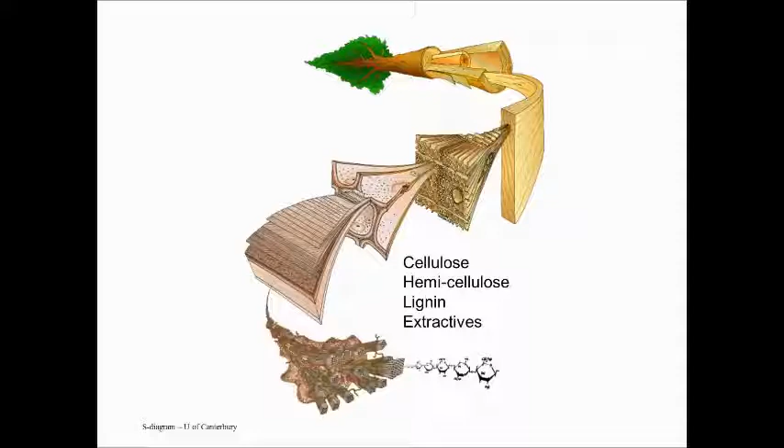Because of the way they're laid down and because of the way wood is, it's very anisotropic, it's very non-homogeneous, and in some cases it's very non-linear in its behavior. And as a consequence of all that, its mechanical property variation is quite high relative to steel and concrete. To give you an idea, coefficient of variation for some of those materials is what, 7–10%. For most wood, we assume that its strength properties' coefficient of variation is somewhere in the neighborhood of 15–20%. And we have to do that because we have to cover the variability of it. That's within one species or one species grouping. If we look at the entire package, we have even a greater variability.

For example, and I'm sure you've all seen this, some of our oaks, wherever you are, oak trees, the wood is very dense, quite durable, and extremely strong. Conversely, if we go out and look at aspen trees, poplar they're commonly called, very low density, not many extractives, so not very durable, and really quite low in strength. And so depending on what kind of species you got and depending on where you're at, you can get quite a bit of variability. And within a structure, especially these older structures, you'll have a lot of people mixing and matching materials, and that can cause some real problems from a property standpoint as well as from a dimensional stability standpoint. So just one of the things we've got to deal with. It's a biological material, and it has relatively high variability.

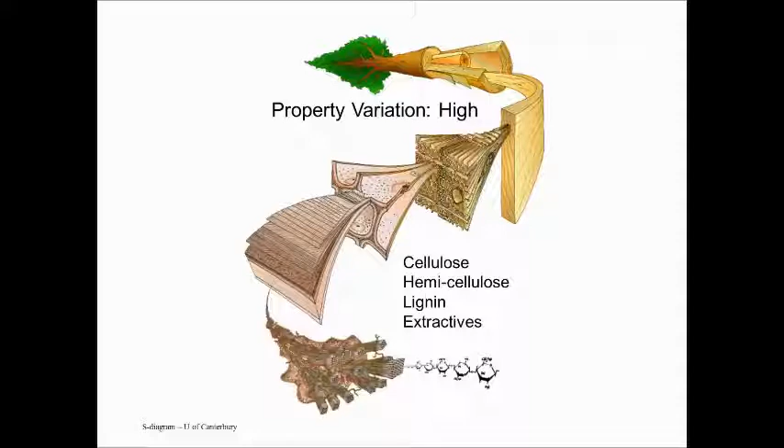Some of the advantages of wood I want to cover. First of all, it has a very high strength to weight ratio, especially parallel to the fiber axis. Wood as it's grown is strongest parallel to the fiber axis. So from a practicing engineer standpoint, it's strongest along the grain or along the 2x4 or along the timber. It's weakest perpendicular to that. Some of the property ratios you'll get is almost a 15 or greater to 1 ratio between parallel to perpendicular properties, so very significant. That's why we have a lot of concern and debate over design of fasteners and how they perform because of that anisotropy of wood. But it is an excellent material from a standpoint parallel to the fibers.

It has a really good record for durability and performance, especially if you look at the photo on the right-hand side. That's a very classic, iconic photo we use. The horizontal member with the nails in it is actually a large timber that survived the fire, and you can see that the steel melted in the fire. Wood does really quite well, especially heavy timber construction in high temperature environments. We get a char layer that forms. The char layer becomes a very good insulator and that insulator protects the inside core of the wood or the timber member that's left from any kind of thermal degradation. So it works really, really well in heavy timber construction and fire. If you want, there is a whole chapter on post-fire assessment in the Wood and Timber Condition Assessment Manual, very well written by one of my colleagues, Robert White. So anyway, it has a very good record for durability and performance.

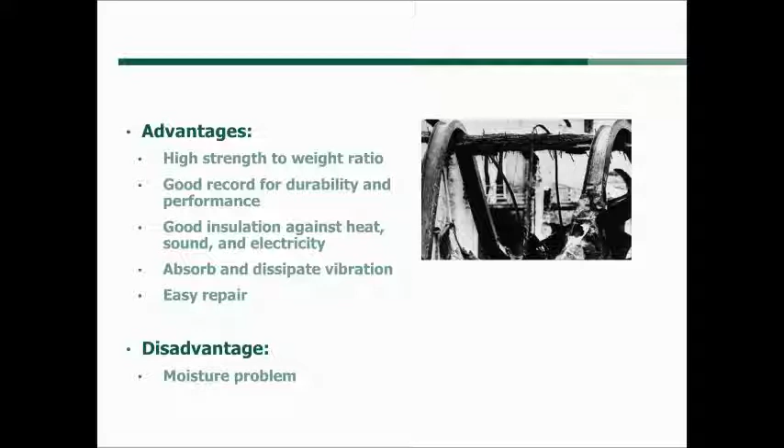If you go to our wood handbook, there's a whole chapter devoted to wood moisture relationships, how it moves, how much it moves for various wood species. The other thing that you have to be concerned about with wood, and I just threw a photo up there, is as beautiful as those fruiting bodies are, they're really cool and nice, and a lot of my artist friends love them. The fact of the matter is, wood is a biological material, and it's a source of energy, and it's a source of food for various bio-organisms.

For example, fungi love to eat the cellulose portion of wood. So when wood gets wet, it provides the necessary moisture in an oxygen-rich environment like we would have above ground. We start to see fungal growth, and I'm sure all you folks have seen that kind of thing. So one of the concerns with wood is its relationship with water. I always say that there's 3 rules with using and designing with wood. Keep it dry, don't let wood near water, and keep water and wood separate. So it's a very important thing.

Now, from an inspection standpoint, and I'll show you some photos of that, the first thing I look for is any place where there's water intrusion or water interactions with wood. For fungi and these biodeterioration agents to work, they need 3 things. They need food and shelter, which is wood. They need oxygen, and they need water. So any place where those 3 things interact, you'll start to see potential for biodeterioration.

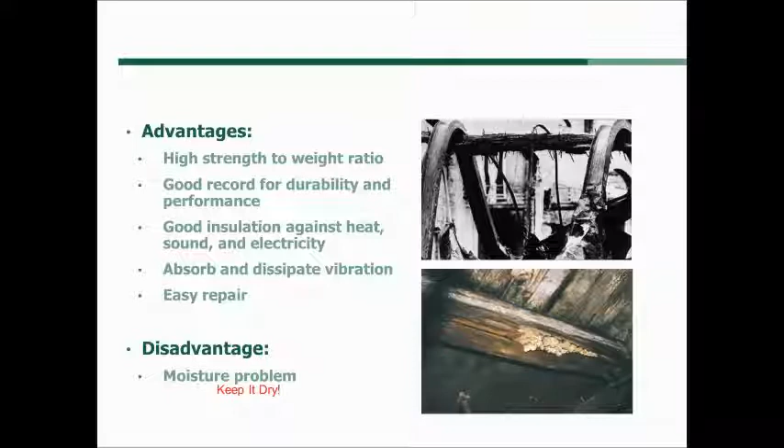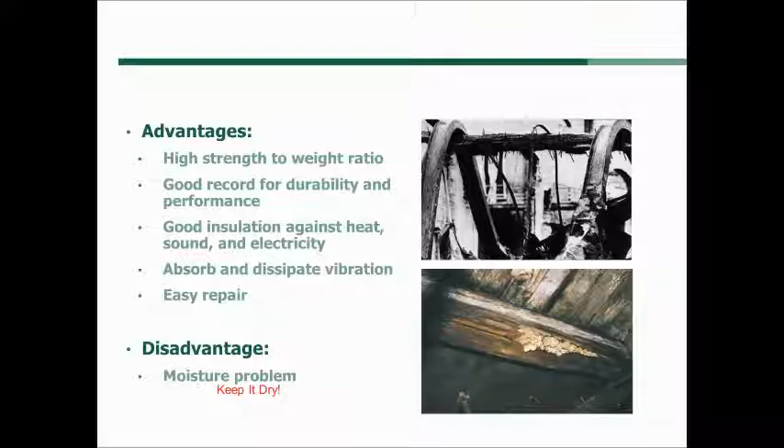And it's a real indication to me, and really drove home to me the importance of wood-water interactions and what can happen if you keep wood dry and manage that, and what can happen if you don't. So anyway, we'll go on to the next one.

Let's start with a little bit of the assessment procedures that we use. When I go into a building or any kind of structure, whether it's a mummy coffin or a historic ship or any kind of building, the first thing I do is an overall assessment, but a couple things we really look for, and if you call in, we need from you. What species is it? I'll go into some of these in a little more detail. That's very important because the design values we use are, to a certain extent, species dependent, but they're definitely species grouping dependent. So that's very important. We need to know that.

We look for things like, what's the quality of the wood? What's the property of the wood? And if you get in there, I'll show you some examples of this. Things we look for are grade stamps, if there's any on there, certain visual characteristics, and from that we can get basic property information for you, or you can derive them yourself from the Wood and Timber Condition Assessment Manual. The other thing we always look for is the condition of it. That's where the condition assessment comes in.

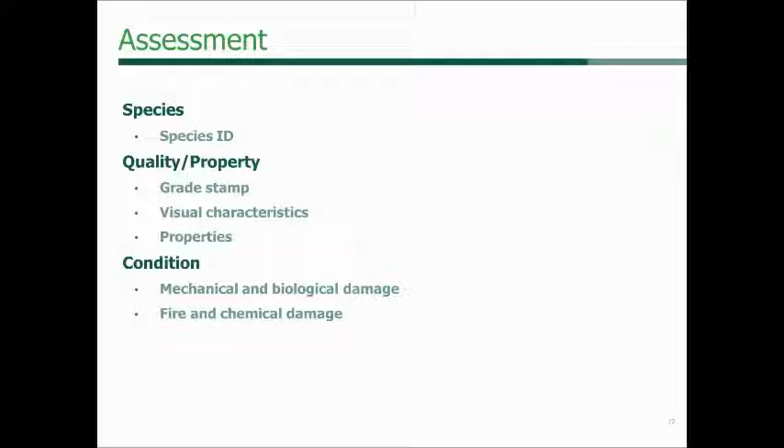Are there any mechanical modifications to the building? I'll show you some examples of that. Any biological damage, any fire damage, any chemical damage? Has it been treated? Is it treated? If so, what's it treated with? Those kinds of things are all important when you want to come up with an overall assessment of a building.

Species identification is usually done with a low magnification visual examination, and there are a variety of consultants. If you get on any of the websites, you can see consultants who do wood identifications. Many universities have wood science programs either in their forestry schools or their material science departments, and they'll do wood identifications for you. We can do a certain amount of those here at the laboratory. We have the largest wood collection at the laboratory, but I always recommend that if you can, get the business out to the consultants and university folks. If you need help getting information on those, give me a call. I'll be happy to give you information on them.

Usually it requires just a very small sample from one of the members, not very big. No more than an inch square. Some of them will even do it if you just send them a sliver. Most of it's done with a small hand lens at low level magnification. And I would guess most of the wood you're going to see in the United States is native to the U.S. And most of the work we do, there's a group of woods that have been used for structural applications for many years, and so it's a pretty narrow band.

But they will provide you with documentation that says, I've inspected this piece of wood and it is such and such a species. Where that's very important, and I get a lot of calls on this, is if there's any loss of life or any loss of limb in any of these inspections, because that will have to be used in a court of law as evidence. So what I recommend in those cases is people get a second wood identification, just like you would get a second opinion in any kind of medical procedure. I recommend getting at least 2 or 3 of those. They should come back with the same species and then go from there. There's a few around, but if you need help, give me a ring.

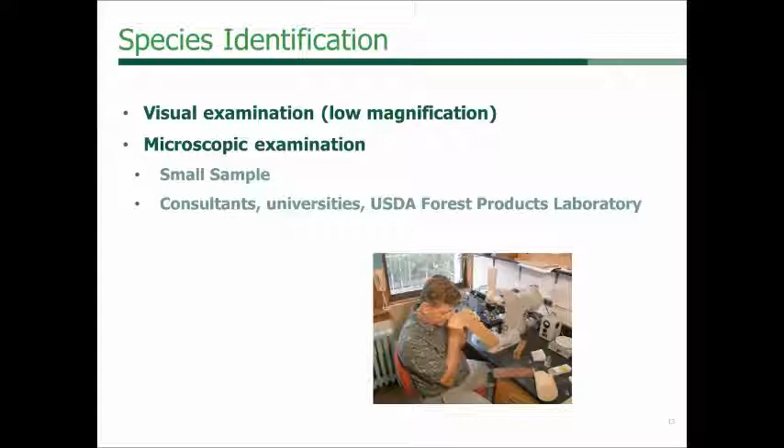You don't have to take out the whole piece. You do not have to tear out the whole piece. You don't have to take a skill saw and go wild tearing things out. Just a small piece of wood, and they'll give you a really good indication of what the species is.

Quality property assessment. And again, I'm not going to go into the details on this, but basically we'll use visual grading rules to come up with the allowable design values. And what they want to look for specifically, on your picture there, you'll see just kind of a generic grade stamp. If you see something like that in one of those buildings and you see it on a 2x4 or 2x12, I always recommend take a photograph of it, get it back to us, because then at least we kind of know what we're dealing with. It gives us a good starting point.

We work very closely with the folks at the American Wood Council and other folks, and once we get that kind of information, we can help you out really quite well. So if you see those, the things that go into one of those grade stamps that we're going to look at, this particular one, it says number 1 and better, that's the grade. That S-GRN, that means it was surfaced in a green condition. That tells us something about the wood.

The very right-hand lower corner of that grade stamp gives us a species grouping, so that kind of gives us an indication of where we're at as far as the species goes. The 12 up on the top there probably is the mill number, so we could trace it back. In some, that refers to the moisture content of the wood when it was constructed. And that little logo on the bottom, that's the indicator of the grading association, in this particular case, Western Wood Products Association.

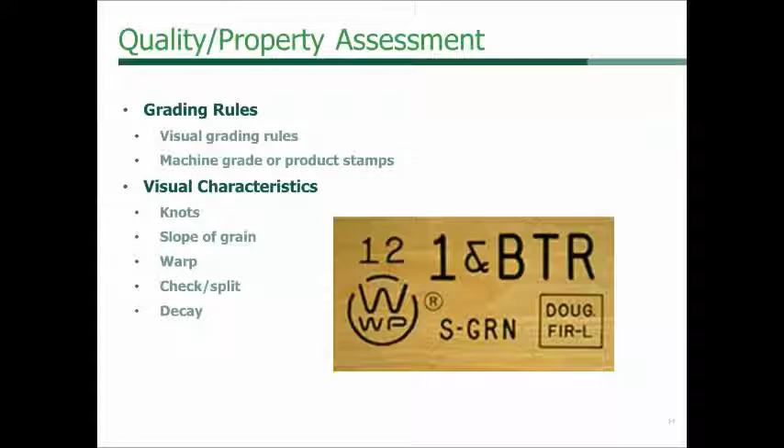That's an indication of very severe deterioration and major reduction in load carrying capacity. So those things are major things you should look for in your visual assessment. Any kind of external deterioration. Now, these are some of the technologies we use, and I'll go through some of these. We look for external deterioration, visual characteristics. We look at probing techniques. I'll show you some of those.

As well as we then will go through and look at internal technologies for detecting deterioration. Simple sounding techniques, drilling and coring techniques, ultrasound or stress wave type technologies, and simple moisture meters. Those are all very good tools that you can use to get an idea of what's going on inside a wood member.

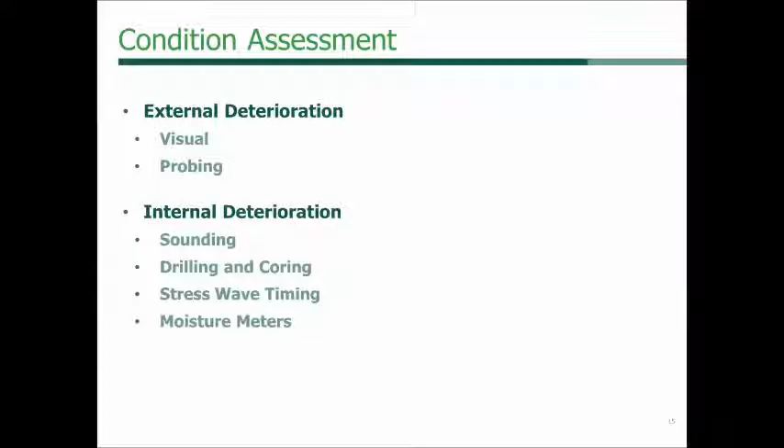Let's start off with the visual inspection. For you folks that haven't done wood inspections, I don't know what you see, but I've got to tell people: always look for the obvious. And I'm going to show you some photos in just a second here that show you some obvious things that you would never think would happen in the field, but they do.

Things I look for: foundation failures. Is the floor level? Are there cracks in the wall? Is there settlement? One of the major things I've seen is the sleeper members that they put on concrete foundations that are wood. If they don't use treated wood material or a highly durable species in that, those will fail, and as a consequence they will deteriorate, and you'll get sloping of the building because of their failure in compression. Those are really good indicators of what's going on.

Signs of distress. I'll show you some photographs of this. Any collapsed, failed members, any excessive deflection, make note of those, then follow up to see what's going on. Any missing members. Now, you may be chuckling, but I'll show you a photo of that in a second. Fruiting bodies, as I said, any kind of biological deterioration that you see, please note it and be extremely leery of any kind of... those probably are significantly deteriorated. Once you start seeing fruiting bodies on it, you've got a major loss in capacity.

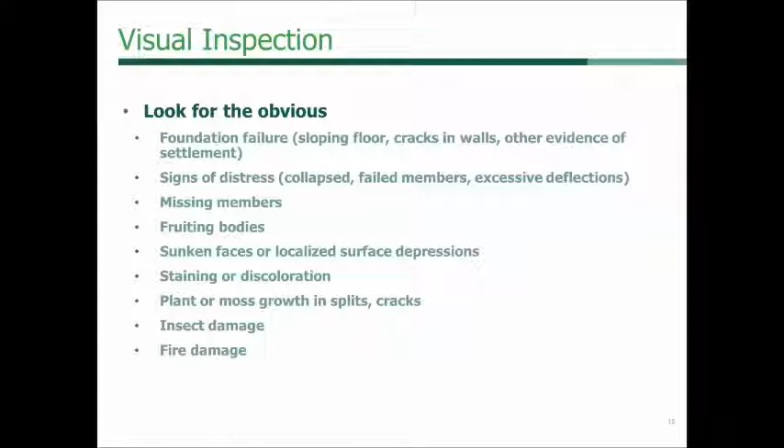But look for the obvious. I mean, a lot of people would overlook this simply because any of us in engineering and dealing with wood would tell you you just can't do those kinds of things. But look for the obvious. Look for anything that can be done with a skill saw, and any repairs, modifications, and think of the absolute limits on that, and then go one or two standard deviations from that, and you'll probably get them.

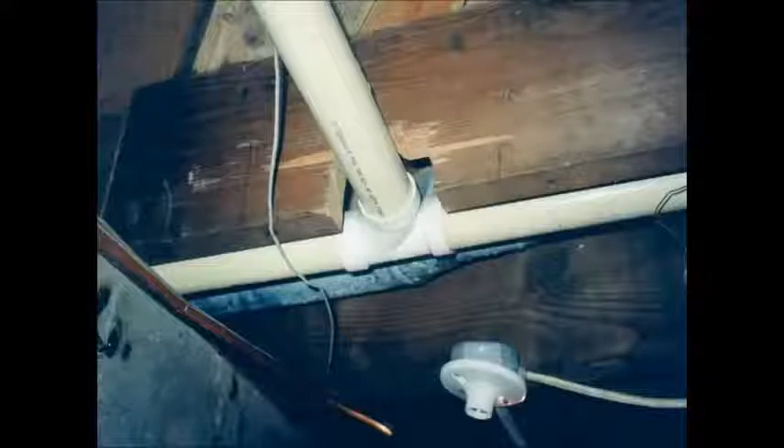Another classic one, I throw this one in here. This is an inspection we did on a historic structure in Pennsylvania. It's some floor joists on a building that was put together in about 1865, 1870. Actually, it was the home of the first chief of the U.S. Forest Service. Anyway, we went in there, and you can see a couple things.

We've got floor joists sitting on a concrete foundation, which is not a problem. It's pretty good. The problem with this is I never recommend that we cut the bottom side of a tension member to put any kind of electrical or any kind of conduits or anything in there. It's not good practice.

Now, I don't have a photograph of this, but I get a lot of phone calls in. I'm sure most of you folks have dealt with the new prefabricated wood I-joists that are on the market. Great products, highly engineered. They have solid wood or laminated wood. They have an OSB, oriented strand board, composite web, and top and bottom members are either solid sawn material or laminated veneer lumber.

I always tell people that the conduits should go in the web. That's where all the prefabricated punch-outs are. And when they call in and ask me if it's okay to cut the bottom chords off those I-joists, I have to tell them that is not recommended practice. That is not a good thing to do.

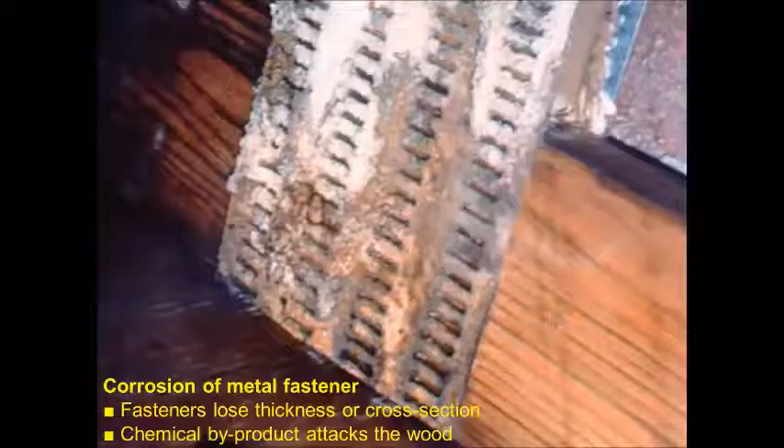The other thing that I tell people to look out for, especially when we get into treated wood products: treatments in wood for biodeterioration protection have varied over the years. We've gone from creosote treated, the heavy black coal tar preservative used for the last century, to pentachlorophenol, which was taken off the market, and then CCA treated, which now has been changed.

A lot of those treatments have a detrimental effect on the wood, and they have a detrimental effect on metal fasteners. And so when I see treated wood and I see metal fasteners, this is a metal plate connected truss in some treated materials. When I start to see the kinds of corrosion that I'm seeing here, I really get very concerned, and I tell people to be very cautious of this.

Now, it's not necessarily bad, but be cautious, because in this particular case, the fingers from that truss plate actually penetrate into the wood and are in direct contact with the preservative chemical. And usually they're salt-based. If there's moisture exposure coupled with the natural moisture that's in the wood, you can get a reaction that will cause significant corrosion of those fasteners and a major reduction in the load carrying capacity.

The fasteners will lose either thickness or cross-section. The fingers may actually deteriorate to the point that they're no longer connected to the plate. And the chemical byproduct will actually attack the wood also. This is one class of materials that we're a little cautious on. You've got to be very cautious and make note of it.

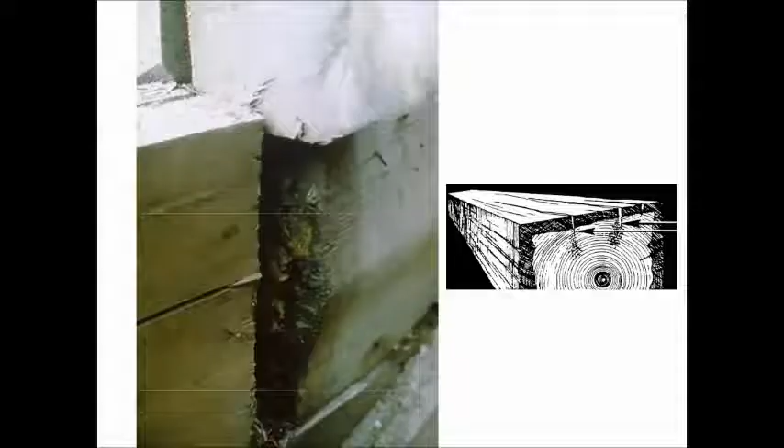This is a specific one I wanted to show you when we talked about two things: failed or collapsed members, and moisture intrusion. This came out of my first inspection, the football stadium at Washington State University. Washington State University is located in an arid environment in eastern Washington. It's a Pac-10 school. I worked on this too long ago to remember, when I was a student.

And all I can tell you is we're very fortunate that WSU did not have a very good football team at the time, because we went in and inspected this part of the structure and it was in pretty bad shape. What you have here is some large timbers. These timbers were Douglas fir and they're treated with the preservative creosote.

The center member is in compression parallel to the fiber axis, and you can see that the outside of it actually buckled. And if you look on the right-hand side, I think it's very illustrative of why that happened. Douglas fir is a great structural material, but it does not take preservative very well because of its cellular structure. There are some unique characteristics of the cell walls that will not let the preservative infiltrate very deeply. As a consequence of that, as is shown in that artist's rendition on the right-hand side, you'll just see an outer shell that's actually treated material.

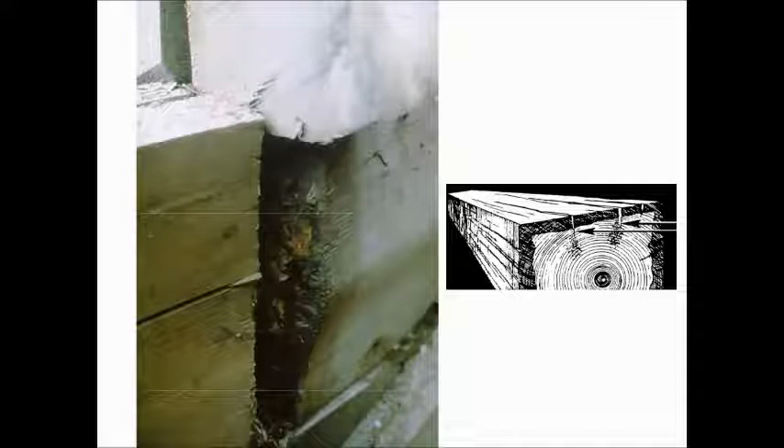So what I always recommend, if at all possible, for these types of things from an inspection standpoint: can you remove the flashing? Can you remove some of these things and actually get in there and take a look at it? Because again, when we've got different materials and we've got access to wood, water, and moisture, we've got a potential problem.